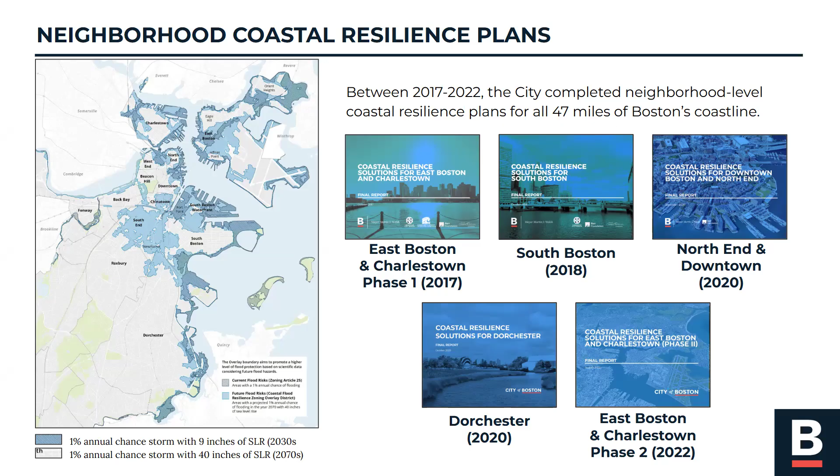And so before we get into our Army Corps work and giving you the details on what these plans will include, I like to set the stage. I put on my engineering hat, and I want to also help you to understand that sometimes it can feel like we are moving in circles. But as we add new information and make changes based on that information, we're actually sharing with you each step of the process, similar to a spiral staircase. So, what we started out in 2016 and 2017 is setting a vision and working through our conceptual plans between 2017 and 2022. We really are moving up levels, we're moving up floors with the eventual goal of getting to construction, operation, and maintenance of the things that we want to build, the places that we want to create these coastal protections. So stay with us here. I promise we're not just going in circles, we're also going up. It's a spiral staircase.

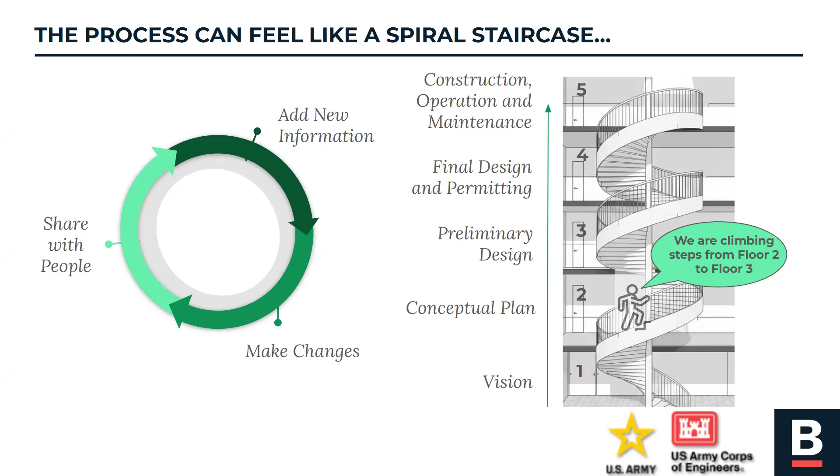But that being said, we don't need to wait for the future to see what the climate change storm impacts and flooding impacts can be. All we have to do is look around and look at our very recent past, our coastal flooding storms in 2018, 2022, every new king tide.

So to kind of help us set the stage before we look ahead at beyond 2030 timelines, I have the opportunity to be able to introduce to you our Office of Emergency Management representative, Kyron Owens, who's here with us tonight, to kind of talk to you all a little bit more about what we're doing today for today's storms and how we're working with the City Office of Emergency Management to help strengthen our response and preparedness to local flooding. So, Kyron, take it away.

All right, thank you so much, and good evening, everyone. It's a pleasure to be here on behalf of the Office of Emergency Management. Once again, my name is Kyron Owens. I serve as the Communications Director at OEM, and so today I have the pleasure of letting you know how we prepare for today's storms and what that process looks like.

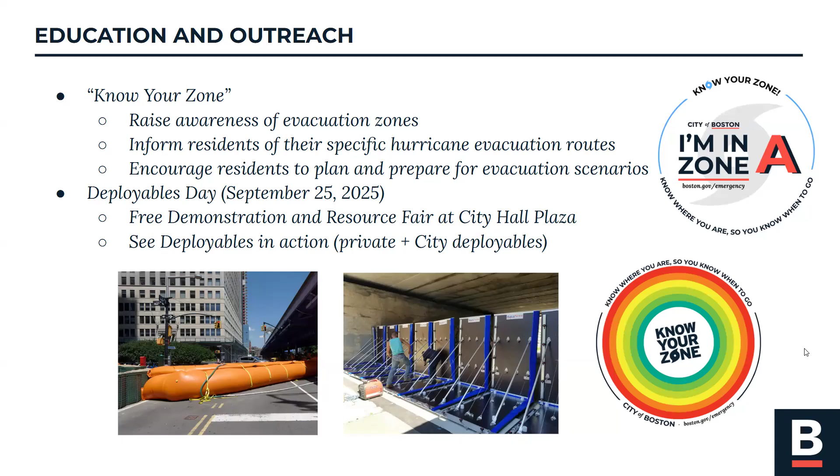So, as I mentioned, we do house all of the emergency plans. So we're always looking to improve those plans and make sure that they are as efficient and realistic as possible. But some things that we've been doing over the last couple years is partnering with different vendors to bring different resources to the city. So there are flood sensors, both inland and in our coast, to allow us to track that. I think Stone Living Lab, shout out to them. I think we have a partnership with them as well.

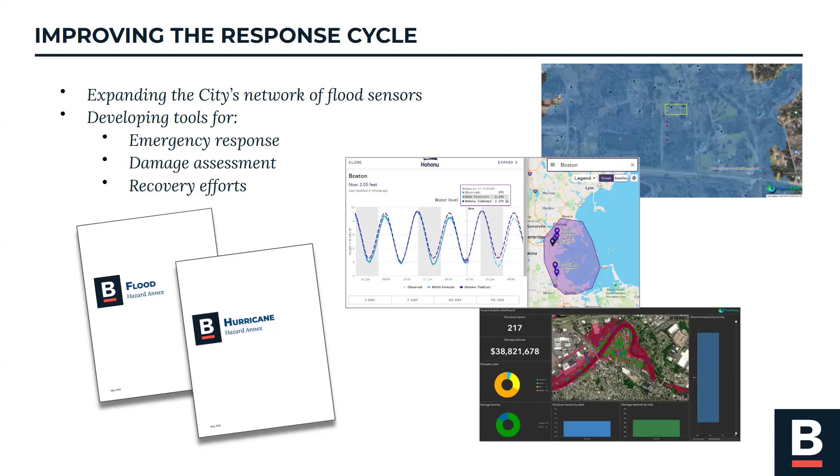So for this decade's storms, basically Climate Ready Boston was looking at three different time horizons: 2030, 2050, and 2070. And so for this decade's storms, we're trying to look at how we can address 2030 flood pathways. So what needs to be done immediately for either an interim deployables plan or an ongoing project that we can work on to make it part of our resilient coastal flood protection system.

So just to kind of walk through a few projects. Piers Park 1 and 2 were completed in 2023, Piers Park 2 most recently by Massport along the East Boston waterfront. So that's something that's been completed in recent years that addresses the 2030 flood pathway. We also have Resilient Border Street, which is a project led by the City Office of Climate Resilience. It was kicked off in 2024, and it's working with private landowners to develop coastal infrastructure along the Border Street area and look at closing one of those regional short-term flood pathways.

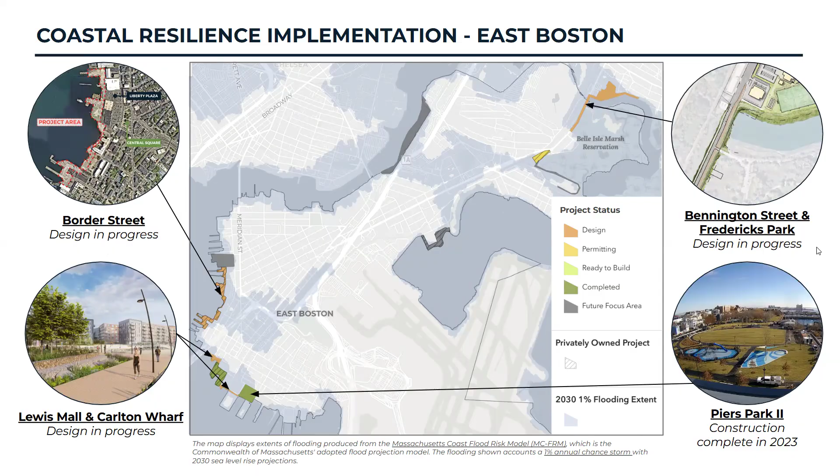Then that leads us to beyond 2030. And how are we going to work together with other city agencies, other state partners to advance the remaining mileage of our 47-mile coastline? And this is where our partnership with the U.S. Army Corps is really critical to helping us turn some of these planning projects, some of these items that haven't been started yet, into the next steps of design and eventually construction. So why now and why U.S. Army Corps?

The U.S. Army Corps has a specific charge that they are authorized through Congress to perform on behalf of the federal interest, which is defined by protecting homes, critical infrastructure, and evacuation corridors. So we in the city of Boston share that same interest with the Army Corps. We are also interested in protecting homes. We're interested in protecting our critical infrastructure, as well as making sure that people can safely move around the city before an event and that emergency management teams can move about the city during an event. However, we're a little different in where our process happens.

U.S. Army Corps of Engineers has a specific process that they follow for being able to design, evaluate, compare projects. And this process is the one we are currently in. So the partnership was started in 2022, and we're about halfway through this process. But ultimately, us being able to work with the Army Corps, work towards this first milestone of having our feasibility study completed in 2028 will allow us to unlock up to 65% of funding match for being able to design and construct these flood protection structures.

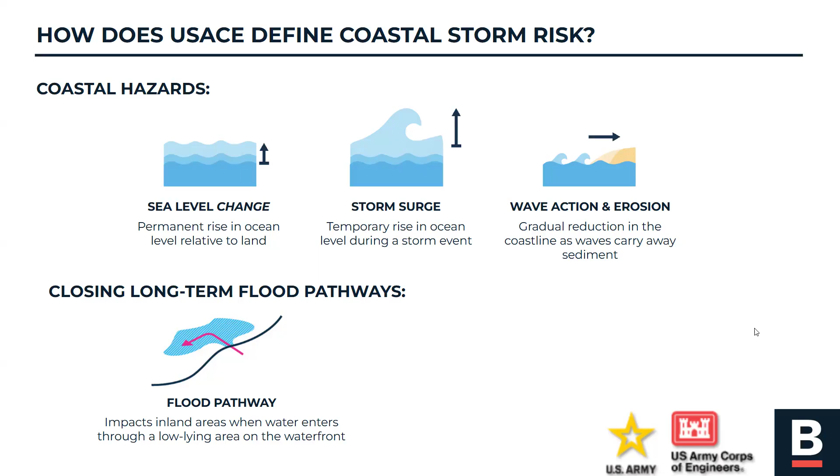And so when we look at wave action and erosion, that's not the primary hazard that we're facing here in East Boston or in most of the Boston communities. What we are facing is that storm surge. And so I just want to highlight that flood pathway arrow, because if we go to the next slide, there we go. This is going to show you probably a somewhat familiar sight.

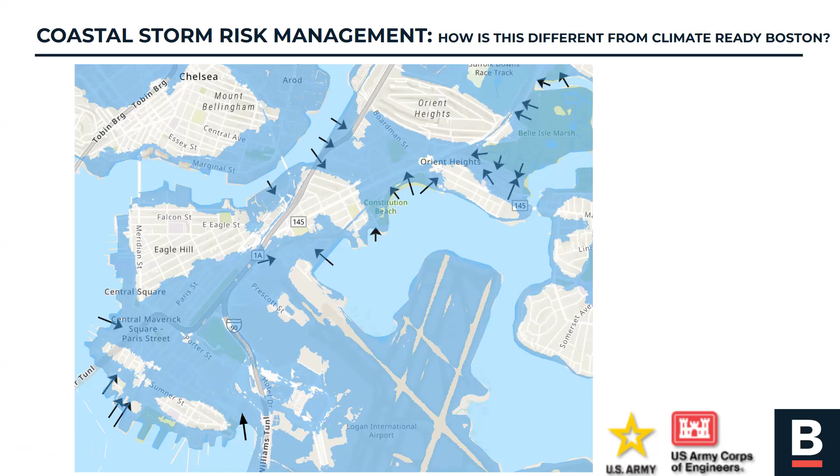A little slow on my end. There we go. Federal interest: if we're going to reduce risk within our federal interest, we have to consider protection of housing, protection of evacuation, protection of critical infrastructure. Those are all things that Kate mentioned earlier. But we have additional missions and we have additional requirements.

Protection of natural resources. Prime example of that, and I'm a fan of Aldo Leopold, A Sand County Almanac, 1949. I mean, 1949, we were already talking about this, that if you don't balance your development with your protection of natural resources, that's how you end up with invasive species. That's how you end up with introduced species that actually end up becoming invasive species. That's how you end up with lack of green space and community gathering spaces. That's how you end up with unavoidable heat consequences.

So we very much have a responsibility to look at the protection of those natural resources, as well as protection of critical transportation. It's easy to say that critical transportation is also critical infrastructure, but it really has to go down to that next level of socioeconomic impacts and the social impacts of not protecting critical infrastructure.

So if I don't protect the Blue Line in East Boston, all of those people who need to get from East Boston to downtown or East Boston to South Boston in order to go to work. If I shut down the Blue Line, that means they need to either find alternate transportation or they get to fight traffic through the Ted Williams Tunnel. Good luck with that. I've seen it when the Blue Line's running great and it's a struggle. So I could just imagine what happens when the Blue Line's not running.

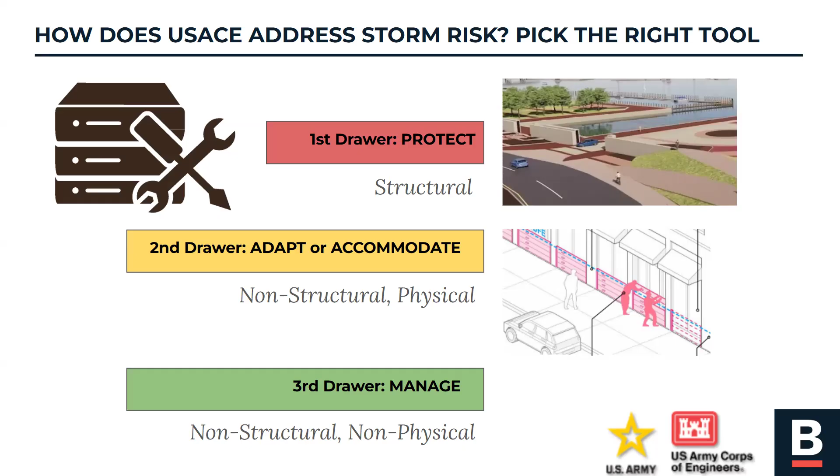So again, I want to give credit to the city of Boston because in a lot of the areas, they are already starting to kind of look forward and look into doing this approach. So let's go to the next slide.

How does this apply to East Boston specifically? Well, we're going to look at what provides the maximum level of protection. How much of a risk is this particular reach within East Boston facing? All right. And then once we identify that, well, we have to look at what is possible to build based off of space constraints, based off of acceptability, based off of environmental impact, all of these things. What is actually even constructible in this area?

And then we have to ask ourselves, well, we can build it and it would provide this level of protection, but is it really appropriate for this area? And so we have to ask ourselves, what is the best fit for East Boston? And it's going to look a little bit different throughout all of East Boston, just like East Boston looks a little bit different than across the rest of the Boston Harbor coastline.

And so I'm going to pause here. I think if we go to the next slide, it should be a blue slide telling me to pause for, oh, no, I'm sorry. Let's pause for questions here and just ask, do we have any questions about what risk means or why we're taking the approach that we're taking?

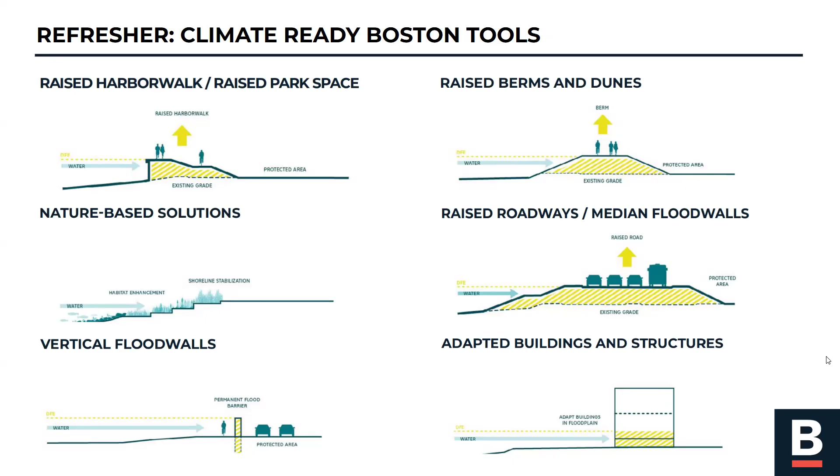I just want to highlight here adapted buildings and structures. World Trade Center Boston is a great example of it, as well as Spaulding Rehabilitation Hospital in the Charlestown area. If you want to go check out what building adaptation looks like in real time, hats off to those facilities. Next slide.

All right, there's two examples to just give you a little bit of a visualization. One is in your backyard. About 45 to 50 minutes south of you, no traffic, an hour and a half with traffic. But that's New Bedford, Massachusetts, and that is the storm surge barrier. That is an extremely large barrier system. And what I want you to understand is I'm not necessarily recommending that feature for you.

Why? Because that's a hurricane storm surge barrier, whereas the city of Boston is looking at storm surge associated with extratropical storms and nor'easters. Could you have an event similar to a Hurricane Bob that actually does come in to Boston Harbor? Potentially, but your everyday risk and your greatest threat is those extratropical nor'easters that you see 3 to 5 times a year. And as we move into the future with sea level change, you're going to see significantly higher water surface elevation. So that's just an example of what a recreation feature on top of that feature might look like.

Another thing, and this is in design for implementation now in Norfolk, Virginia. It's our sister district in the Norfolk area, but they've got a CSRM project, and this is an elevated harbor walk. It's a trail on top of their flood wall, their seawall. Now, the reason I want to show you this picture is because, maybe you can read it, maybe you can't, but it says USACE pump station. Now, we are not suggesting that we need a New Orleans type pump station pumping thousands of CFS, cubic feet per second, of stormwater out. That is not what we're saying.

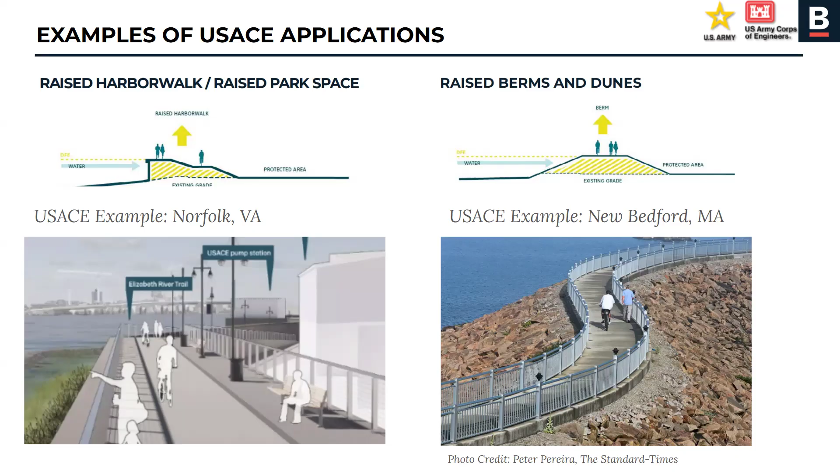And so that could very well be a pump station. Maybe it's a storage basin. Maybe it's just gravity fed with different gates in order to keep the storm water out. And there's all sorts of different options. But this is an example here where they had to utilize a pump station. And there could be areas across Boston where we need that pump station. Next slide.

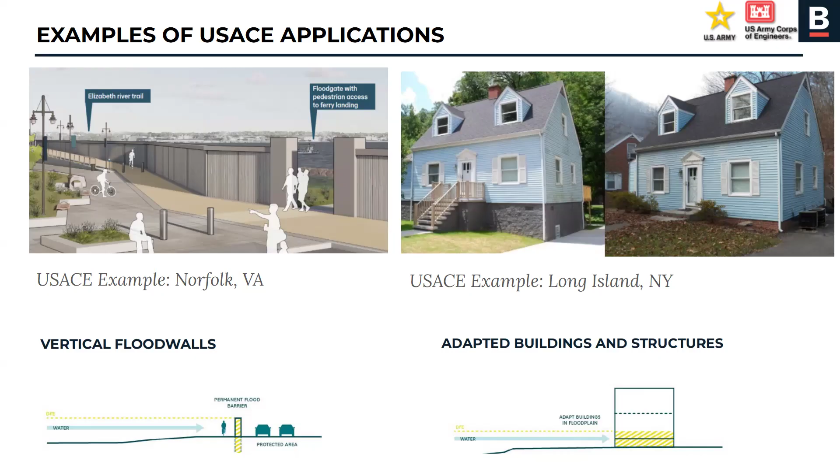Next slide. I appreciate everybody's patience. I want to kind of pause here and talk real quick on tools and see if there's any questions.

All right, I also need to give my interpreters a break because I'm speaking 1,000 words per minute. Octavio, Carlos, if I can just get a thumbs up that you guys are good. Maybe you need a sip of water. All right. Hey, thanks, guys. I realize I speak fast. And even after reminding myself constantly, I'm still guilty of it.

So let's talk about the city of Boston, specifically East Boston. Next slide. I was going to say, this is your break now, Jeff. I was just going to give a little bit of context for how we would like your help today. So just a reminder, we're going to go through the locations. We're going to be able to talk through what Army Corps is looking at right now. We have the opportunity to have a preliminary draft review of the location for some of the layouts that they're proposing for our Boston Coastal Storm Risk Management Study.

So we'd love to hear your questions, your concerns, and we'd also like to ask for your help with a few questions. Did we miss any areas? When it comes to risk assessment or protection, what is important to you that we should know about either the tools that are in the toolkit or the locations that we have currently selected as our preliminary draft locations.

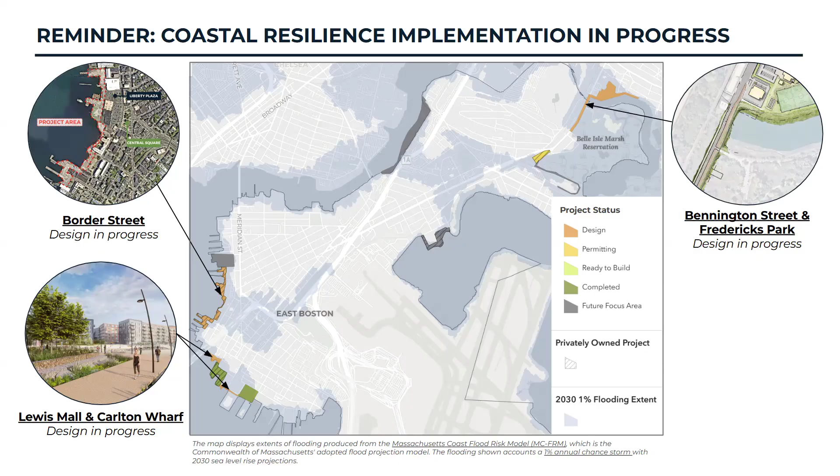But just a reminder, when I turn it back over to Jeff, we're just walking through these preliminary drafts that we have selected as locations for Army Corps, and they do cross over with several of our projects that we're already working on. So with that, back to you, Jeff.

Awesome. So I want to highlight a question that came up in the chat. And the question was, what are the actual build times for the different measures, i.e. construction start to finish? And so that's a wonderful question. I wish I could give you a perfect, straightforward answer, and I'm not going to try and tap dance too much.

But what I will say is as part of building this plan, we have to understand how are we going to phase it. If it's a $1 million plan, $1 billion plan, a multi-million-dollar plan, or a multi-billion-dollar plan, there is an understanding that we're going to have to construct it in a particular order, using a phased approach. And so understanding that will help us to understand what features we're going to construct and how long those features are going to take to construct.

If I have to construct a wall in a dense urban environment, it's going to take longer because of the excavation necessary and maneuvering around buildings as well as production rates. Whereas if I have to build a shallow foundation berm in an area that has a lot of laydown area and open space, it could go quicker. And so understanding what the feature is, where the feature is going, and how we're going to be able to construct it is really going to drive those construction times. So you could be looking at months to years to multiple years.

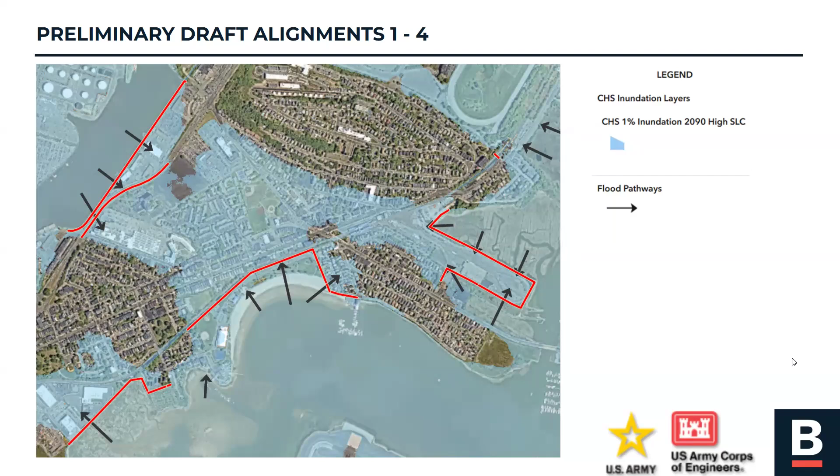Yeah. And I want to be cognizant of time. I'm going to try and wrap up in the next few minutes because I want to leave time for comments or questions and concerns. And so as we get to a couple areas that either had public meetings with the City of Boston, Border Street, Bennington Street already, I may try and breeze through those in order to get to questions, but I don't want you to think those areas are not important in the study area. It's the complete opposite.

Let's talk about this area, Piers Park and Jeffries Point. And if you're familiar, well, most of you probably live here, and so you're probably more annoyed by the tourists. But me, I travel in and out of there quite a bit. And when I do come in there, I occasionally have to rent a car. And when I do, I have to go down Tomahawk Drive to the rental car center, right? And so when you go down there, it goes along this beautiful area. But that area is a flood pathway, and it's a flood pathway into the community behind here.

And so one thing that we're looking at is how can we manage the risk without increasing other risks. This is Tomahawk Drive. We could take the approach where we come through and we elevate the harbor walk that's along the coastal edge. That's an absolutely viable solution. However, if we do that, we could have significant impacts on these trees right here. So instead of doing that, why wouldn't we just elevate this portion of Tomahawk Drive? The trees get to stay. In 10 years, people forgot what the old road looked like. But at the same time, when the flood comes, it's cut off. So that's just an example of, yes, we could do it this way, but is it the appropriate tool for the community in this location?

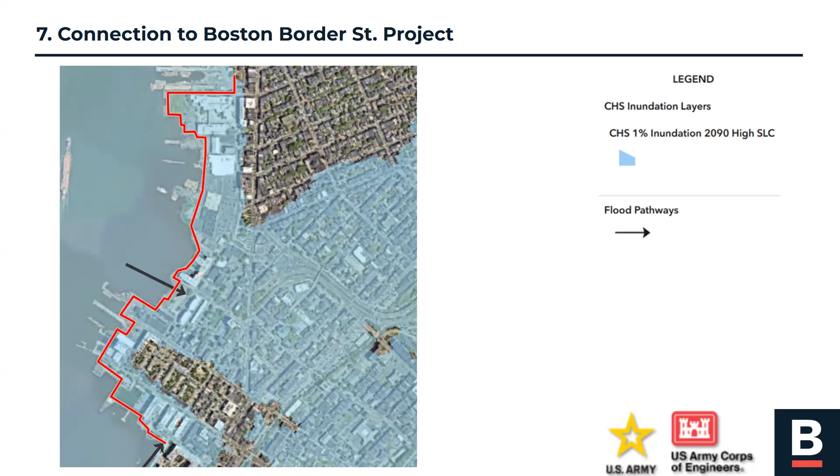All right, so in summary, we're looking at long-term risk, and we're looking at tying our long-term projects into those immediate projects of the city, Boston Water and Sewer Commission, Massport, MBTA, all of these other stakeholders, and there's lots of private stakeholders out there. That's one thing. If you know of a project happening out there, we may or may not be aware of it. So please, take advantage of this opportunity to share what you know with us.

In addition to that, it's a matter of understanding what the current impacts are and understanding what happens if we build something. What are your concerns? What happens if we don't build something? What are your concerns? And then we will utilize all of that in a very holistic way as some of our considerations in order to identify what is the appropriate tool to address the risk and the level of risk in each particular area. And it may be a little bit different, and that's okay.

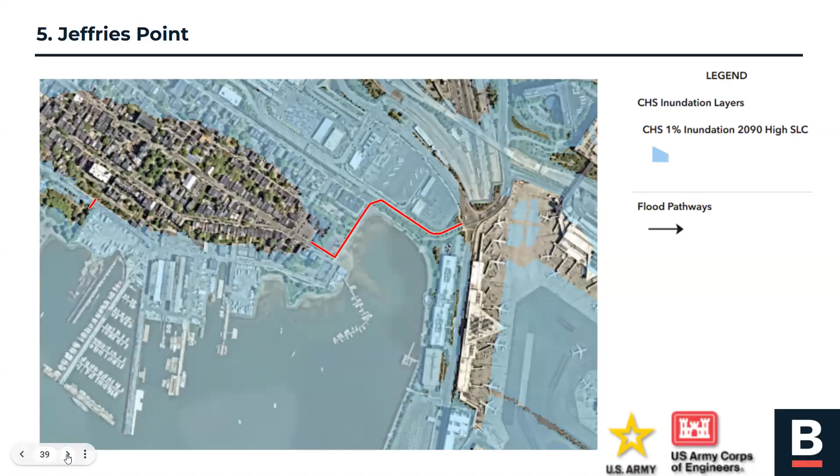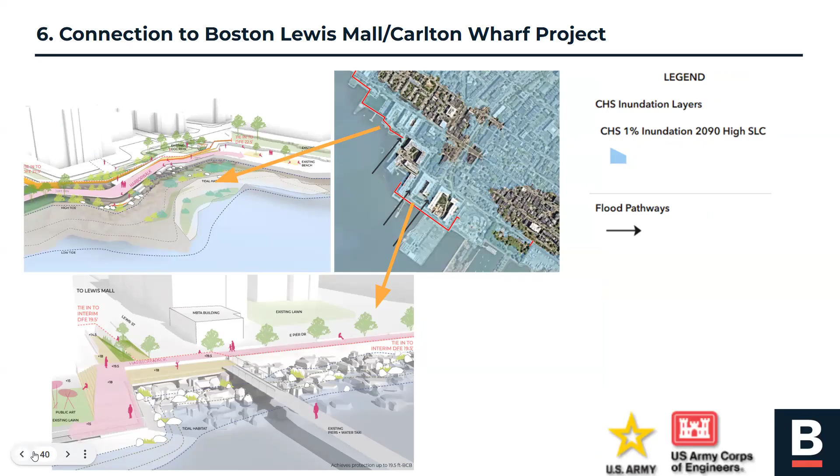There is another question that I want to highlight here. Are the red lines on these maps representative of project feasibilities already worked out, or at least initially scoped? The answer is we have identified that the projects in these areas based on the red line are constructible, and they would be engineeringly feasible based off of the subsurface information that we already have and the wave conditions and the water conditions that we know about. So there's still some questions to be had about full environmental impacts. There's still some questions to be had about constructability based off of which type of feature it is. But generally speaking, we've identified that we can construct in those areas.

The second part of that question is probably just as important. Is that written up anywhere? The answer, no, not yet. Again, this is the start of the conversation. We will come back out in the November, December timeframe for the official NEPA public scoping period, at which time we will be able to provide more information and more data as we continue to refine what our options are for interventions in this area.

And then the next step after that, there will be another follow-on engagement probably right after the new year, January, February 2026 timeframe, in which time we will actually publish a full draft report that has all of our engineering analysis, all of our, we call them formulation strategies, but really it's why are we recommending where we're recommending. And so it will better get at what you're asking for, John. And I see you have your hand up.

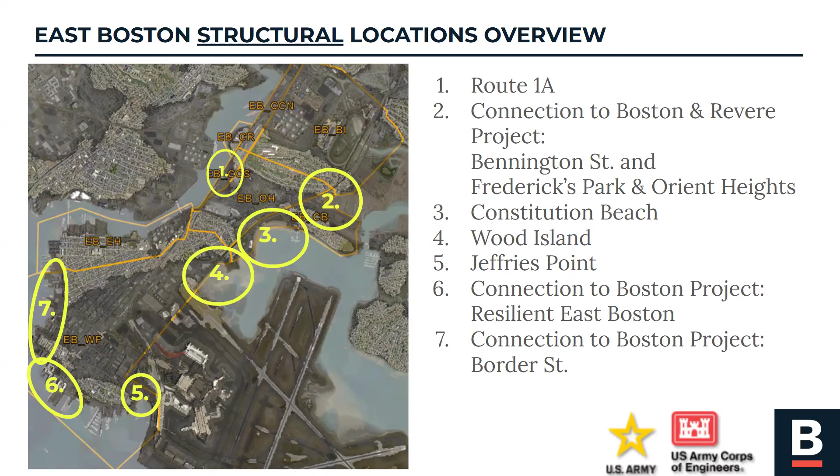So the answer at this point is we have not identified any need to construct in other municipalities. However, we are working closely with that other sister study and the state to make sure that we integrate our solution and our system recommendations into that larger regional 17 community plan.

Wonderful. Are there any other questions that folks have tonight or items that they'd like to share with the group?

We did get a score update. Thank you, Bud. Thanks, Bud. Red Sox are down 1-0 in the fifth. Yeah, I wasn't going to say anything just because as soon as I said it was 0-0 in the bottom of the second, a certain individual who happens to be a Yankees fan let me know that they had just hit a home run. And so I stopped giving score updates because I didn't want to make it insurmountable. John, go for it. Don't jinx us.

Just in terms of this looking at the sort of long-term projects to address long-term risk. And obviously it's the Army Corps of Engineers, so it's engineering. But I'm just sort of curious, when we do look at the long term, 2070 and beyond, there are some areas that, to your point of the real estate aspect of this, just might not be viable as real estate. And I'm just wondering where that plays in.